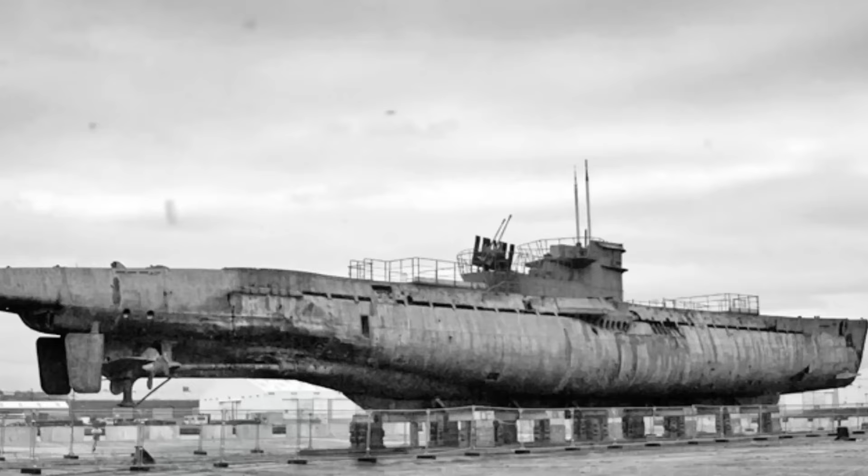November 8, 1944, Admiralty Research Laboratory, Teddington, England. Dr. James Whitmore places a sample of Type 7 U-boat pressure hull steel under the tensile testing machine.

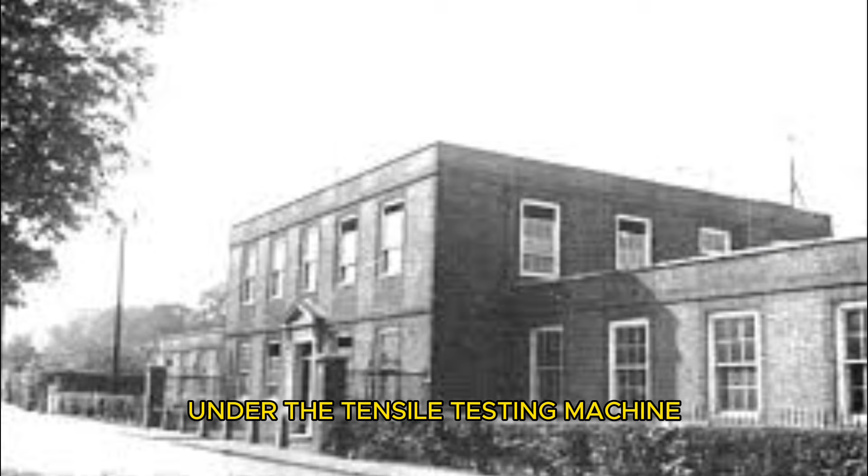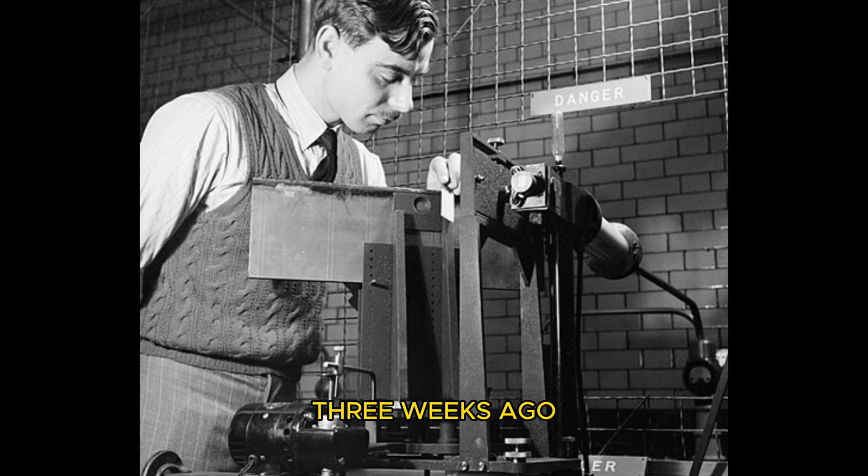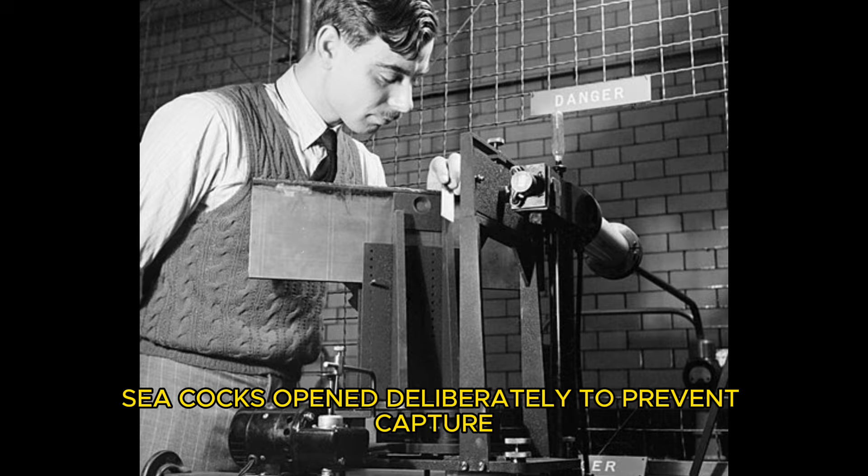The metal specimen is 2 inches long, half an inch wide, precisely machined from the hull of U-534, a German submarine recovered intact after scuttling in shallow Danish waters three weeks ago. The U-boat was found resting on the seabed at a depth of only 40 feet. The crew escaped, hatches open, seacocks opened deliberately to prevent capture. British salvage teams raised it, pumped it out, towed it to England. Now pieces of it are in Whitmore's laboratory being tested to destruction.

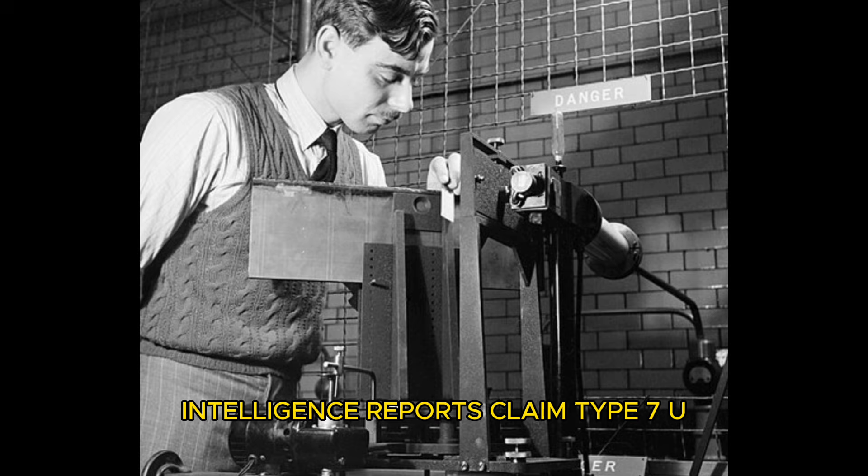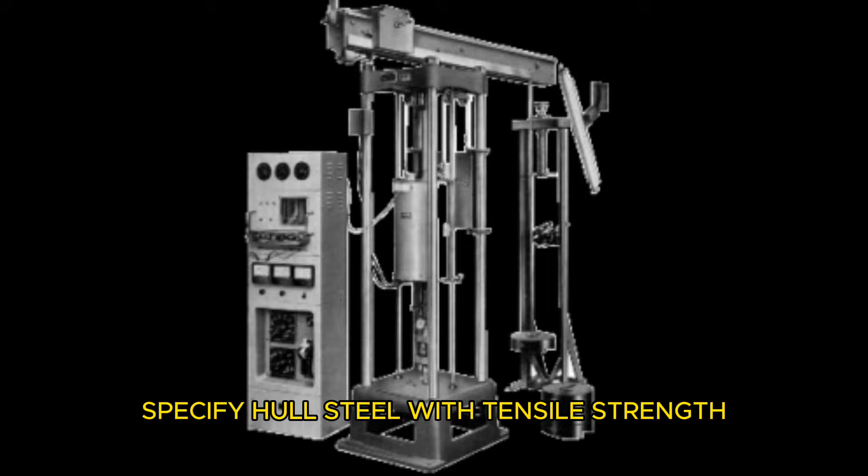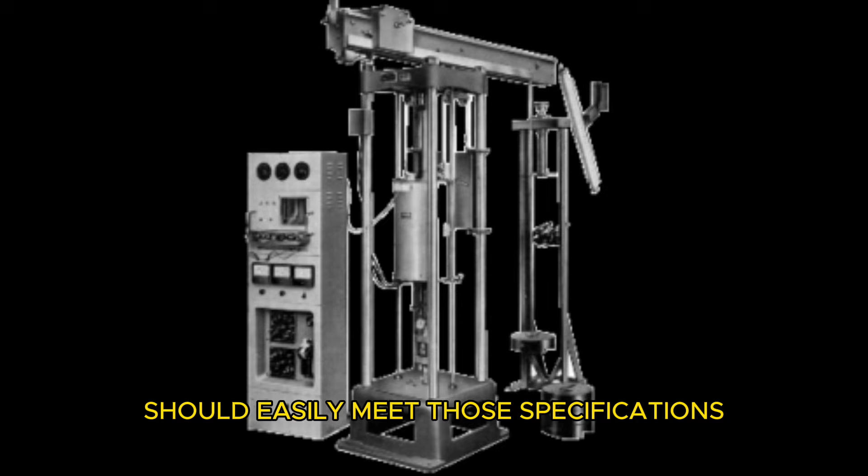Intelligence reports claim Type 7 U-boats can dive safely to 200 meters. German technical manuals captured in France specify hull steel with tensile strength sufficient to withstand pressure at that depth. The steel Whitmore is testing should easily meet those specifications, should withstand the crushing force of water at 200 meters depth, should perform as designed.

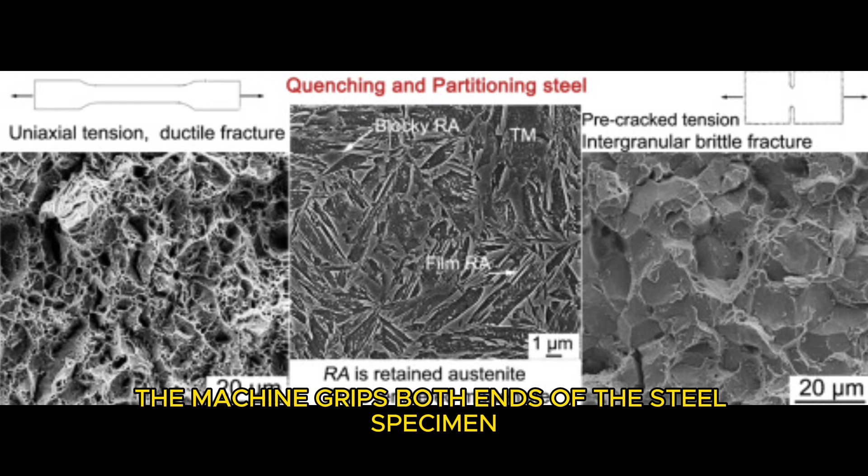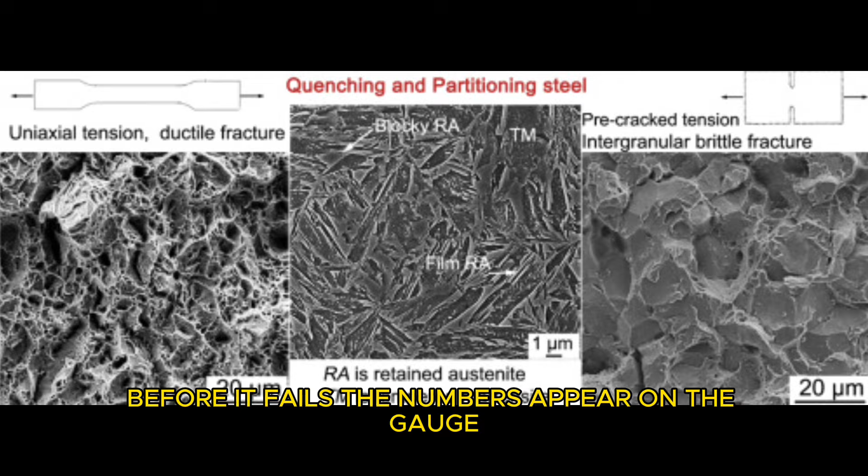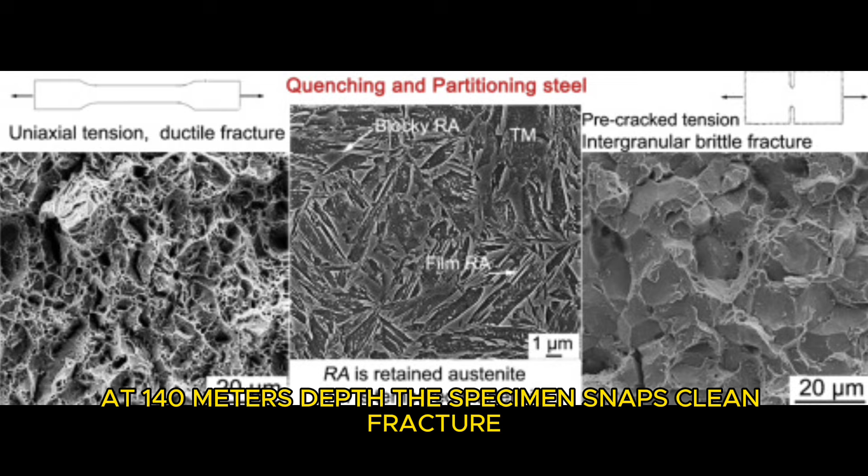Whitmore starts the test. The machine grips both ends of the steel specimen, begins pulling, applying force, measuring how much stress the metal can withstand before it fails. The numbers appear on the gauge, climbing steadily. The steel resists. Then suddenly, at a stress level equivalent to water pressure at 140 meters depth, the specimen snaps. Clean fracture, brittle failure, no warning, no gradual deformation, just sudden, catastrophic failure.

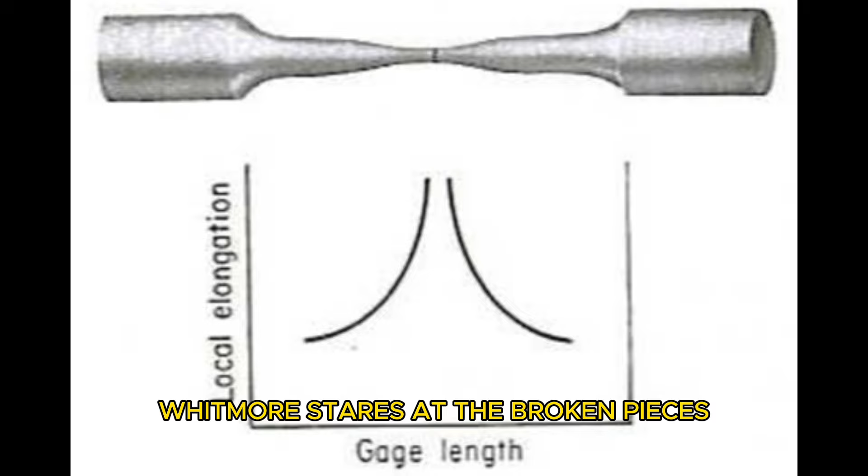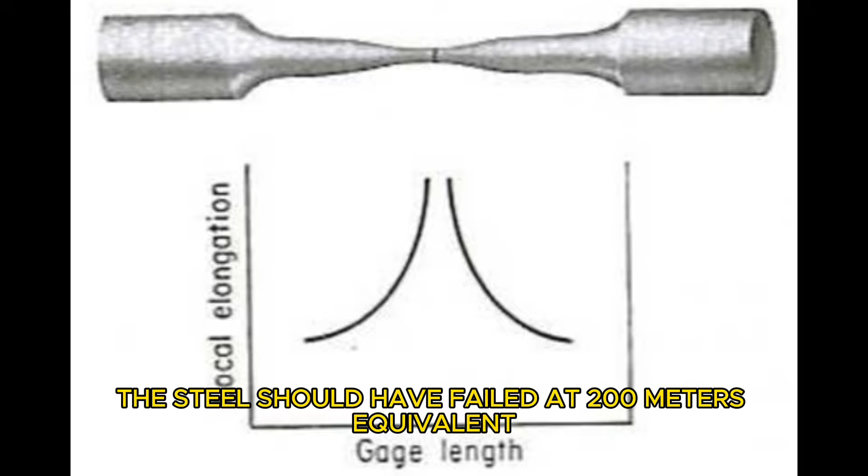Whitmore stares at the broken pieces. This should not be possible. German metallurgy is supposed to be excellent, among the best in the world. The steel should have failed at 200 meters equivalent pressure, not 140.

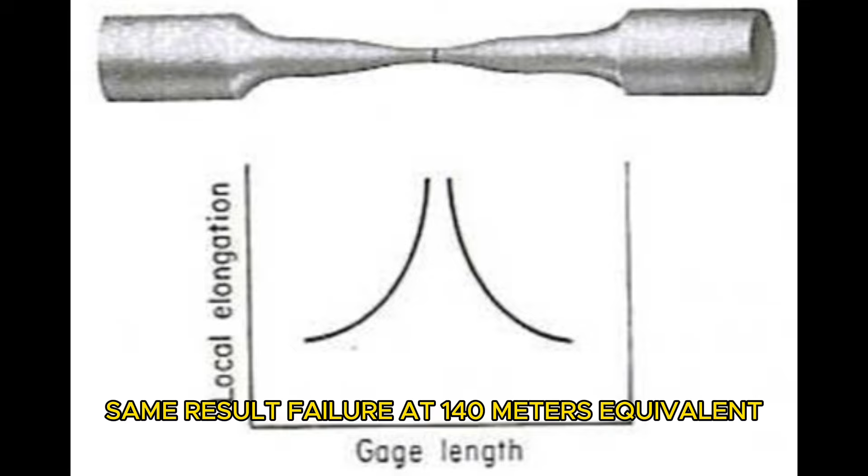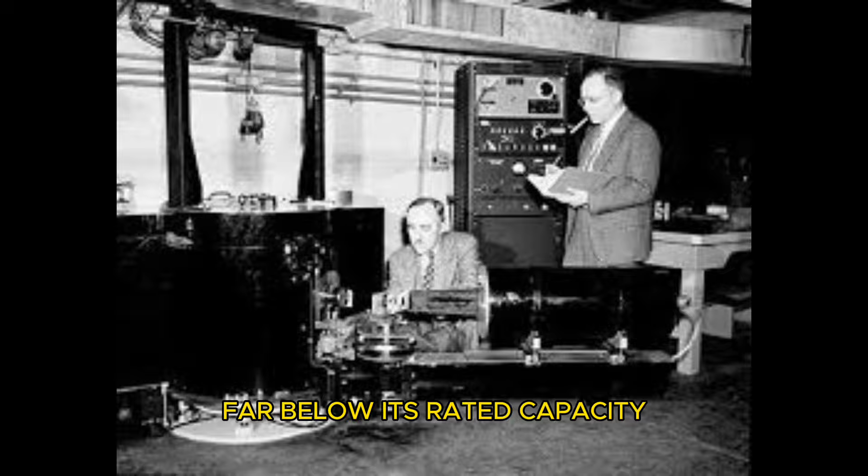He runs the test again with a different specimen from the same U-boat. Same result: failure at 140 meters equivalent. A third specimen, same failure point. The pattern is consistent and impossible to ignore. The steel is failing at pressures far below its rated capacity. Something is fundamentally wrong with U-boat hull steel.

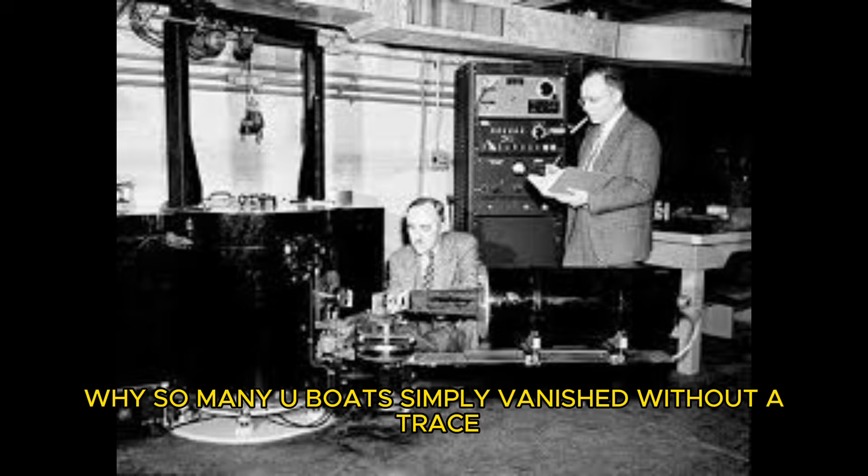This discovery will explain one of the great mysteries of the Battle of the Atlantic: why so many U-boats simply vanished without a trace. No wreckage, no survivors, no evidence of attack, just gone, disappeared in deep water.

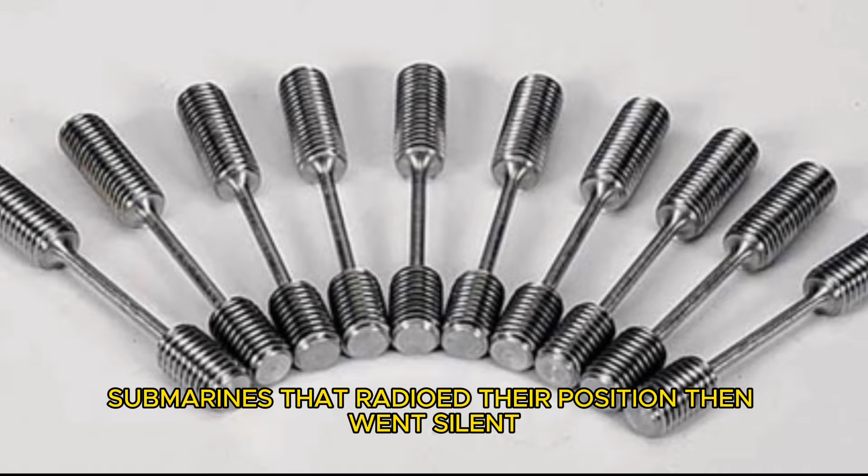Naval intelligence has been tracking these disappearances since 1941. The numbers are significant. Out of 783 U-boats lost during the war, approximately 200 vanished in circumstances suggesting possible structural failure rather than enemy action. Submarines that radioed their position then went silent. Boats operating in areas with no reported Allied activity. Losses in deep Atlantic waters where recovery and investigation are impossible.

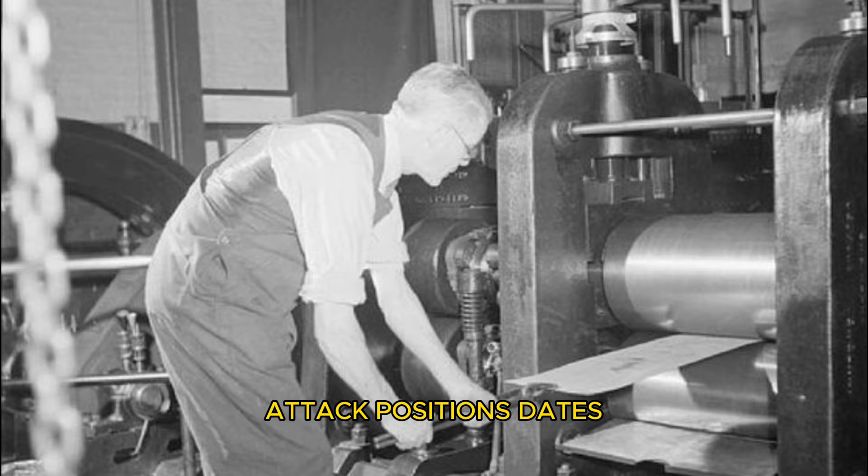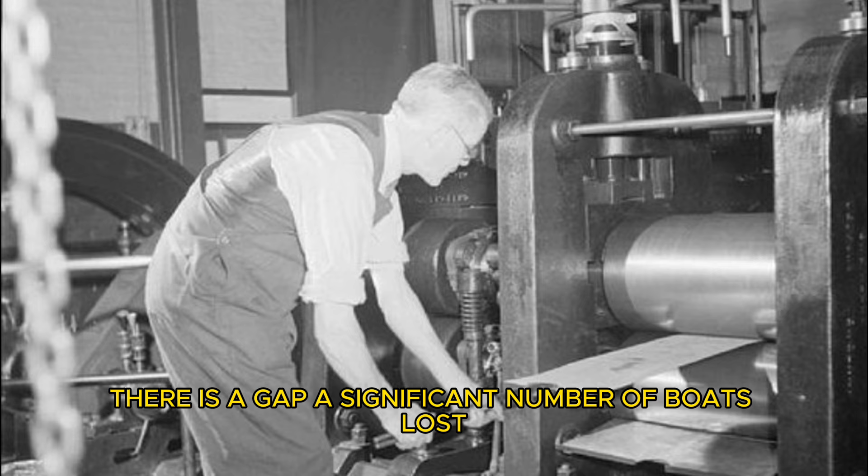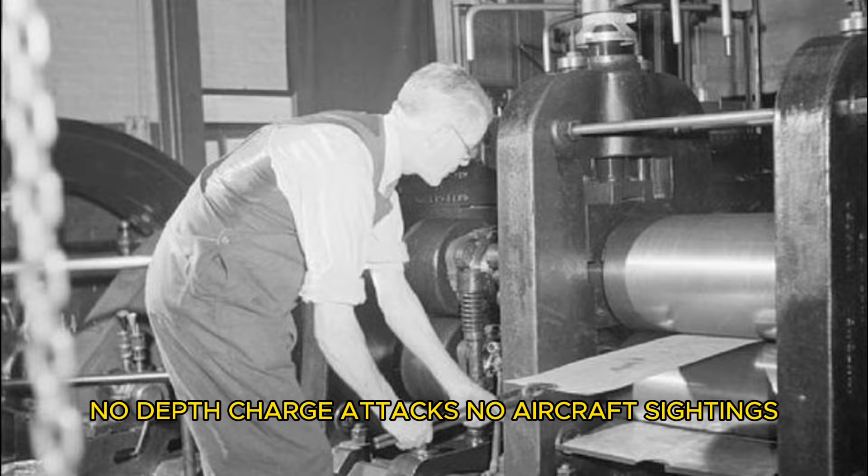The official German explanation has always been enemy action: depth charges, air attacks, mines. But the locations and circumstances of many disappearances do not support this. British and American forces maintain detailed records of every U-boat attack: positions, dates, times, weapons used, results. When analysts compare known attacks to U-boat losses, there is a gap. A significant number of boats lost with no corresponding Allied action in the area. No depth charge attacks, no aircraft sightings, no minefields, just boats that stopped transmitting and never came home.

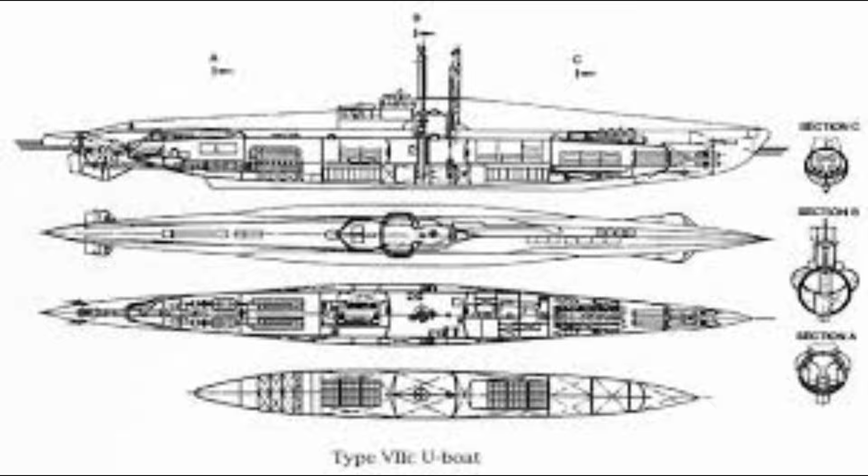The assumption has been that these boats were destroyed by actions that went unrecorded, or hit mines that were not charted, or suffered mechanical failures. But Whitmore's test results suggest another possibility, a possibility more disturbing than enemy action. The boats were destroyed by their own hulls, by steel that could not withstand the pressure, by metal that failed catastrophically when the submarine dove too deep.

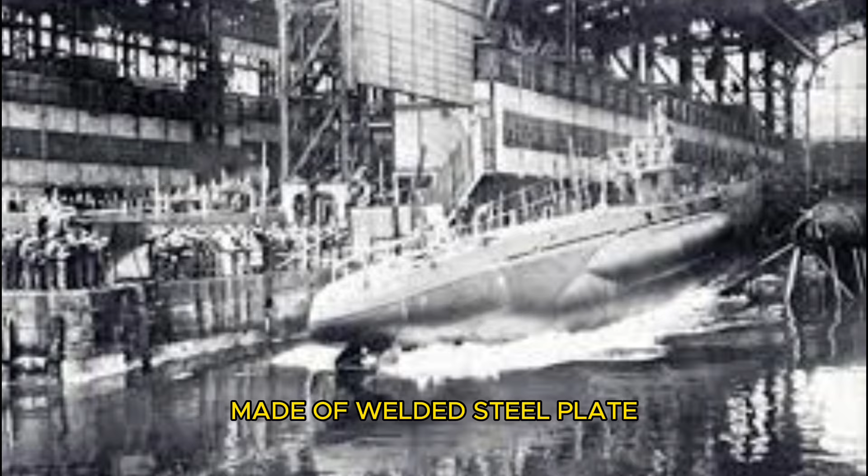The Type 7 U-boat was Germany's primary submarine design throughout the war. 709 were built between 1936 and 1945, more than any other submarine class in history. The design was proven, reliable, effective. The hull was a cylindrical pressure vessel made of welded steel plate 21 millimeters thick in the pressure hull section. The steel specification was ST52, a high-tensile structural steel widely used in German shipbuilding.

According to German engineering documents, ST52 steel had a tensile strength of 520 megapascals, sufficient to withstand water pressure at depths exceeding 250 meters. The hull design included a safety factor. Test depth was rated at 200 meters. Crush depth, the theoretical maximum before catastrophic failure, was calculated at 280 meters.

German submarine commanders knew these numbers, knew that diving below 200 meters was dangerous. Below 280 meters was suicide. The boat would implode, the pressure hull would collapse, everyone inside would die instantly. But 200 meters was supposed to be safe, was supposed to be within design limits, was supposed to be survivable.

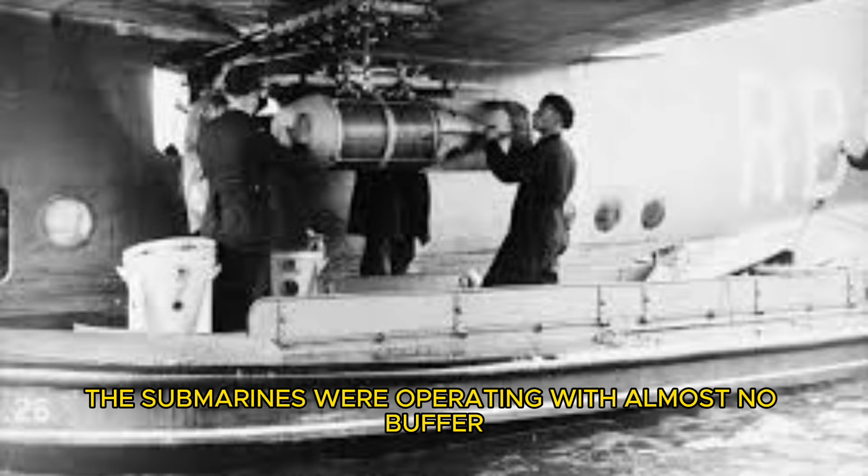Whitmore's test results indicated otherwise. The steel was failing at pressures equivalent to 140 meters. That meant the actual crush depth was not 280 meters, it was closer to 180 meters. The safety margin had disappeared. The submarines were operating with almost no buffer between test depth and catastrophic failure.

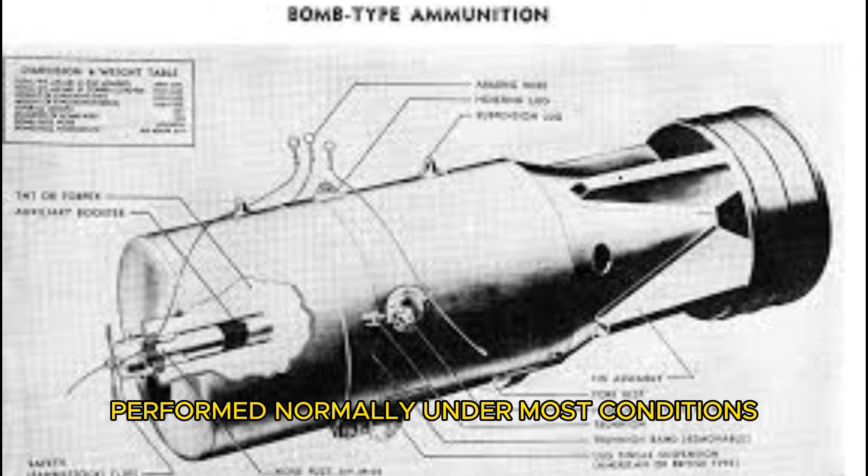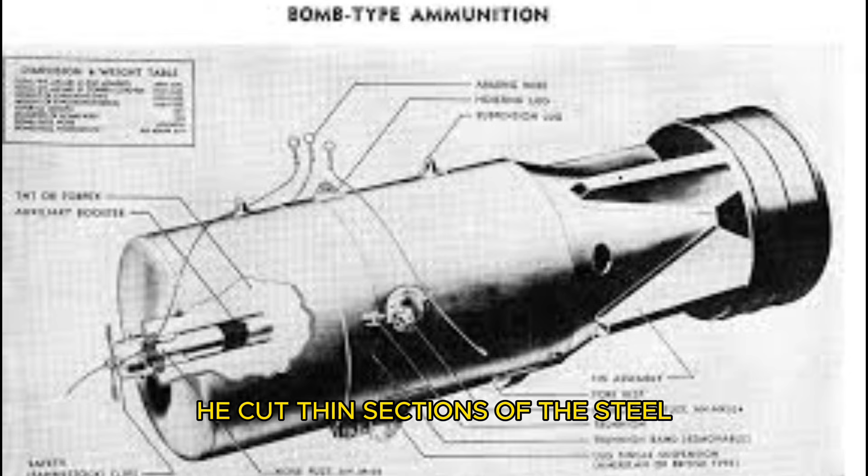Whitmore needed to understand why. He began detailed metallurgical analysis of the U-534 hull samples. First step was examining the microstructure. He cut thin sections of the steel, polished them, etched them with acid to reveal the grain structure, examined them under high magnification. Normal steel has a relatively uniform grain structure. The individual crystals of iron and carbon are small and evenly distributed. Good steel has fine grains.

Poor steel has coarse, irregular grains with inclusions and defects. The U-boat steel showed significant problems. The grain structure was coarse, irregular. There were large inclusions of slag and impurities. The metal had not been properly refined, had not been adequately processed. It looked like steel made in a hurry with inadequate quality control.

Whitmore moved to chemical analysis. He needed to know the exact composition, what elements were present, in what quantities. Standard ST52 steel contains iron, carbon, manganese, silicon, and small amounts of other elements. The proportions matter. Too much carbon makes steel brittle. Too little manganese reduces strength. The balance must be precise.

Whitmore used spectroscopic analysis to determine composition. The results were immediately concerning. The carbon content was slightly high, not dramatically, but enough to affect brittleness. The manganese was lower than specification. Silicon was within range. But there was another problem.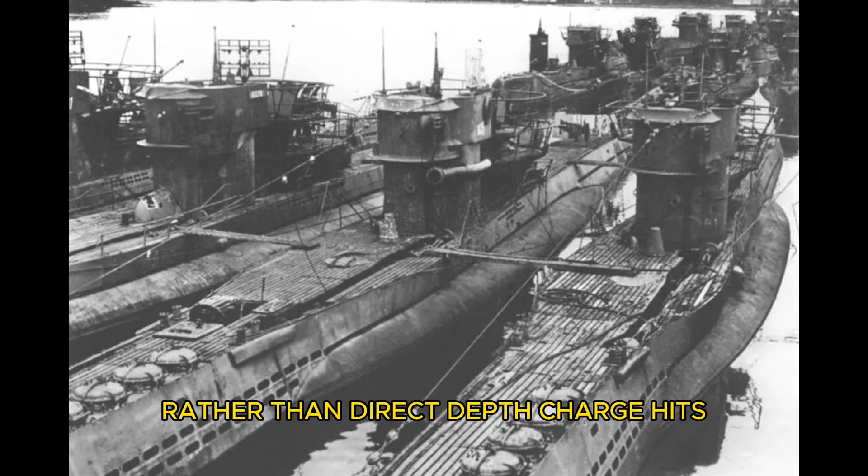Submarine hull steel all show implosion damage. All were lost in deep water. All probably failed due to inadequate hull steel rather than direct depth charge hits. The wrecks are evidence, silent testimony, proof that the analysis was correct, proof that German submarine steel was fatally compromised, proof that hundreds of men died in boats that should never have been sent to sea. The evidence sits on the ocean floor, undisturbed, slowly corroding, but still telling the story, still showing what happens when you compromise materials in pressure vessels, still demonstrating that metallurgy matters, that chemistry matters, that molybdenum matters.

The families of U-boat crews lost to possible hull failure never knew, never learned that their sons, husbands, fathers might have died from defective steel rather than enemy action. The German Navy never publicly acknowledged the problem. The information remained classified or obscure. When families received notification that their loved one's submarine was lost, the cause was listed as enemy action or unknown. The possibility that the hull failed was never mentioned.

Some families might have preferred knowing, preferred understanding that their loved one died from equipment failure rather than in combat. Others might have found it worse, might have been angrier learning that the submarine was sent to sea with known material deficiencies, that Germany sacrificed submarine crews to steel shortages, that the deaths were preventable. The truth was kept secret. The families grieved without knowing.

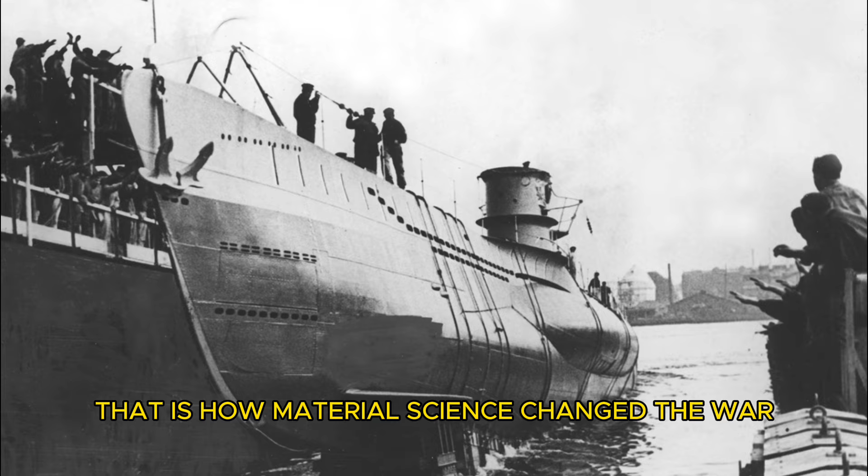That is the story that remains mostly untold. The story of the invisible killer, molybdenum deficiency, brittle steel, imploding submarines. The story that ended with hundreds of men at the bottom of the Atlantic, crushed by water pressure, their hulls could not resist, dying in machines their country knew were inadequate, but sent to sea anyway. That is what Dr. James Whitmore discovered when he tested steel from U-534. That is what his report meant. That is how material science changed the war. That is the story of the steel.